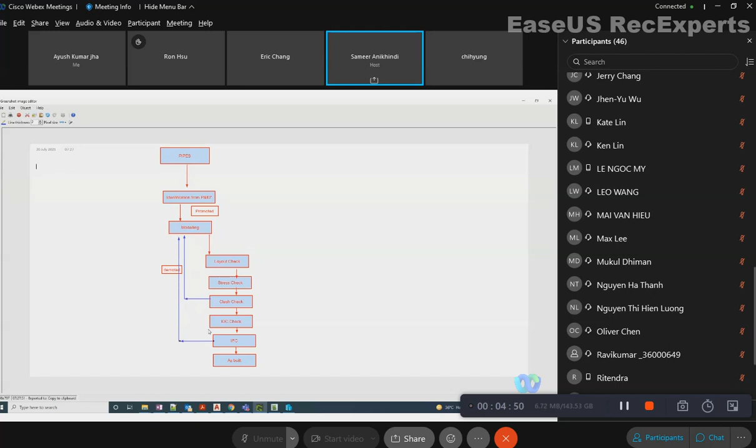Let me change the color of these. So the blue arrow is demotion, right? Or it can be sent from any other stage also. So promotion and demotion can happen, or if a second revision has come, it will again go back to modeling, then again it will pass through these stages and

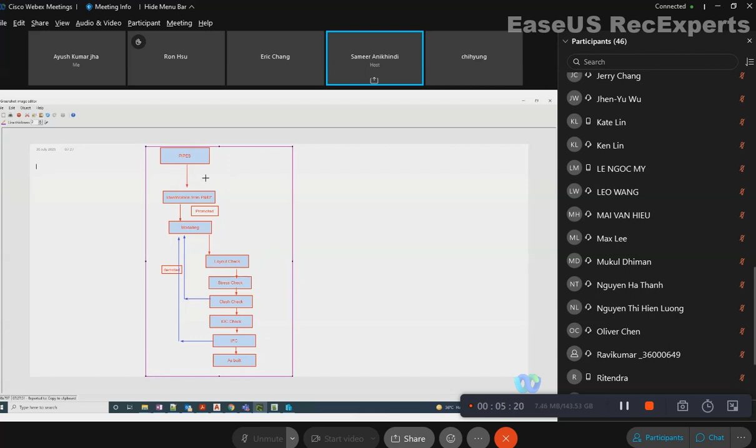it will go to as built finally. So between different revision cycles also this can follow this path, right? So this is the example of piping. A similar example can be done for equipment, for individual components like valves, instruments. These are just example stages. These stages are configurable - you can have 10 stages, you can have 3 stages, 4 stages.

That is configurable by the administrator. We have one example given, a simplistic example given in the manual that we'll follow. But similar stages can be developed for any kind of component. And then the designer has to allow these stages for the components - for piping, for structure, for equipment - and he needs to promote it or demote it as per the actual condition in the plant.

Okay, so I can say this is the pipe life cycle for modeling. This is only for modeling. A life cycle can be made for the complete process, from identification in the basic engineering up till commissioning. That kind of life cycle can also be made for each tag number, each pipe tag number. So you got a little idea of what status control is.

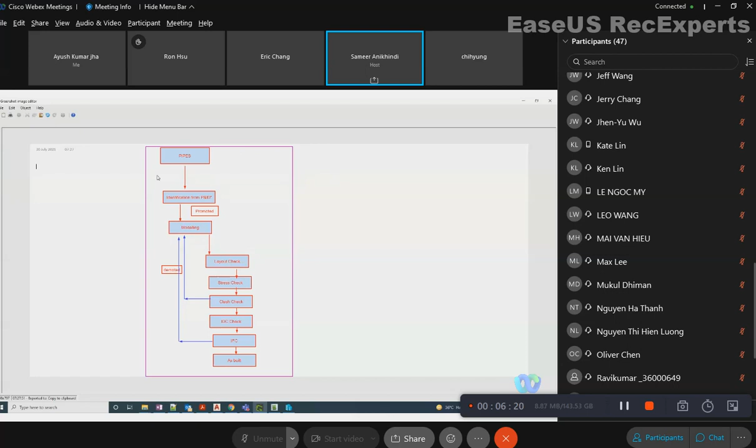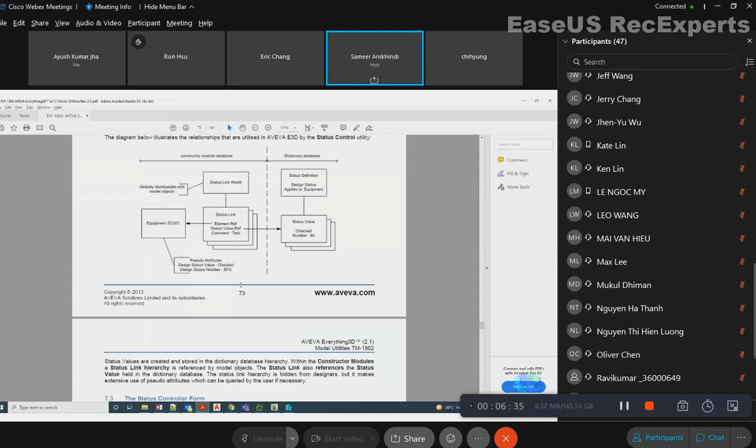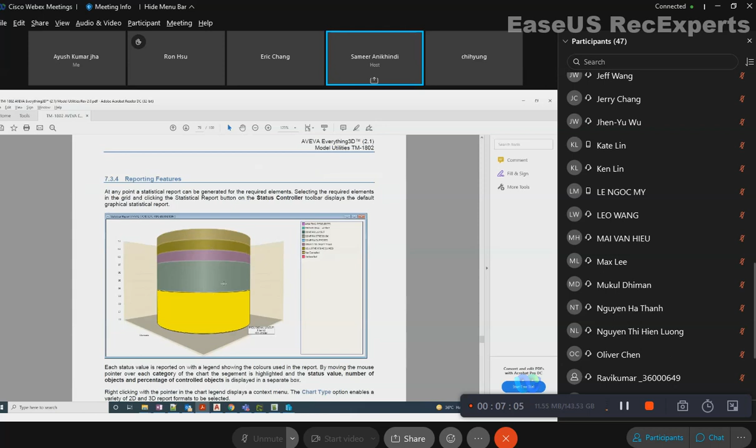We can now see in the model a practical application of it. So once you assign this status for a couple of pipes, a couple of elements, you can take out a statistical report like this - which tag number is at what stage. For example, you can see issued to draft team, confirm stress, okay, and all these things. So you can have graphical reports. This is especially useful for lead engineers and managers to review the overall status of the modeling.

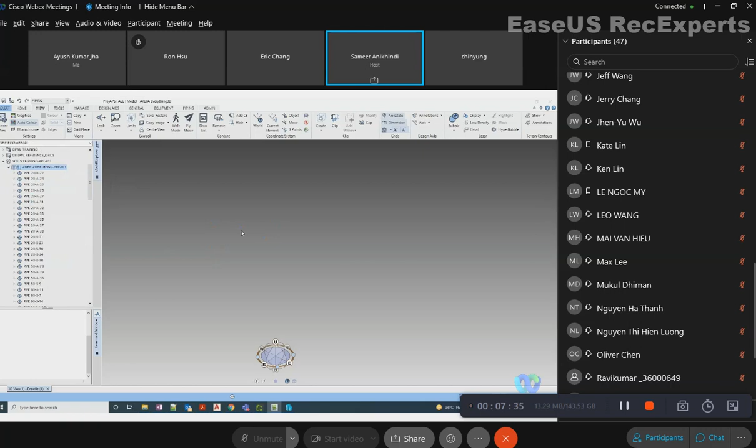Okay, so let's see how to open status control. Let me remove everything, just keep the pipes - I will take the example of piping. So I have this area 01. Let me remove this one, aid group. So this is my piping. I want to do status control of these area 01 pipes.

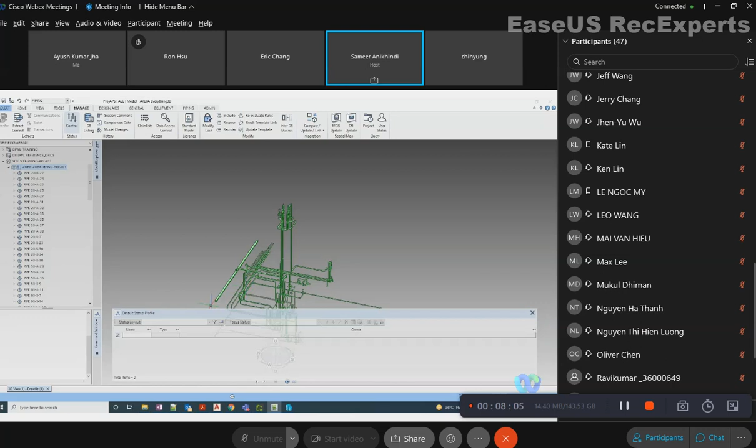So where can I open it - manage, status group control. So it will open a window like this. You can extend this window. Over here the first thing you need to do is new layout. So different kinds of layouts, or you can say status cycle, are defined by your administrator in the database. In your project, you have to select for the available components which layout you will apply, so you have to click on new layout.

So you can see these are different status cycles for different kinds of elements. Over here you have tag, schematic, branch design status, pipe design status. So tag and schematics are for P&IDs and engineering products. So you have piping design status. You can extend this and check - so inside that status, how many columns are there? Design status description, design status number, and comment. So almost all of the statuses have these 4 columns. So when I select, it will show 4 columns over here.

And these are not the stages, first of all - these are not the stages, these are just the columns inside the report. We'll see the stages after a while. Similarly you have critical line status, piping design status, pipe design status. Let's see what the manual has used.

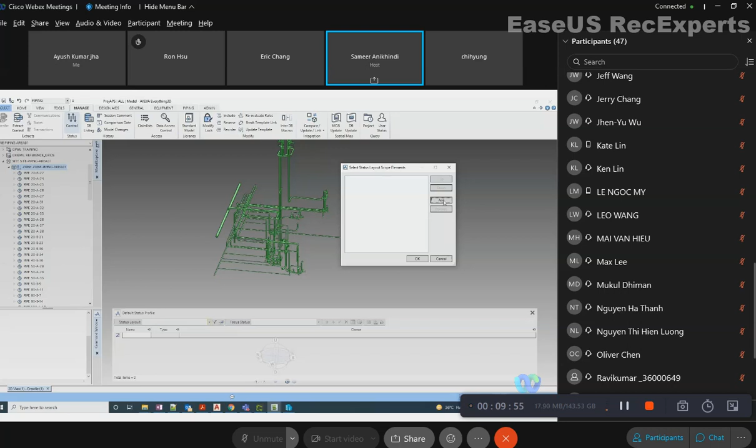Okay, we do not have the training one, but let's select this pipe design status. Click OK. Then you have to select scope of elements - what all scope you want to add. So you have to click on add, so it will open that, you know